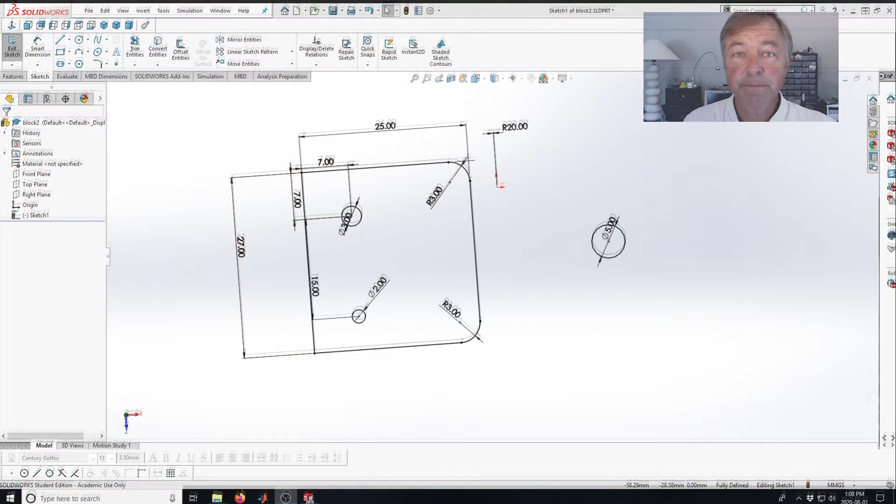Back to this sketch that I was working on in the last video, and I'm just going to carry on working on this sketch for now. So you can see I did the radii, I did these holes, but what I'm really thinking is this part that I'm making, I want it to be a plate that I can bolt to the ground or bolt to something. And I fixed this circle and this one, which will be holes when I do an extrusion. I fixed them relative to each other as I showed you in the previous video.

So I've made this. And you can grab any of the dimensions and move them around so that they're easier to read. I've made those dimensions relative to each other, so now I can't move the circles around. And you know, I could just keep doing these. I could draw some more circles, but that seems like that would be tedious.

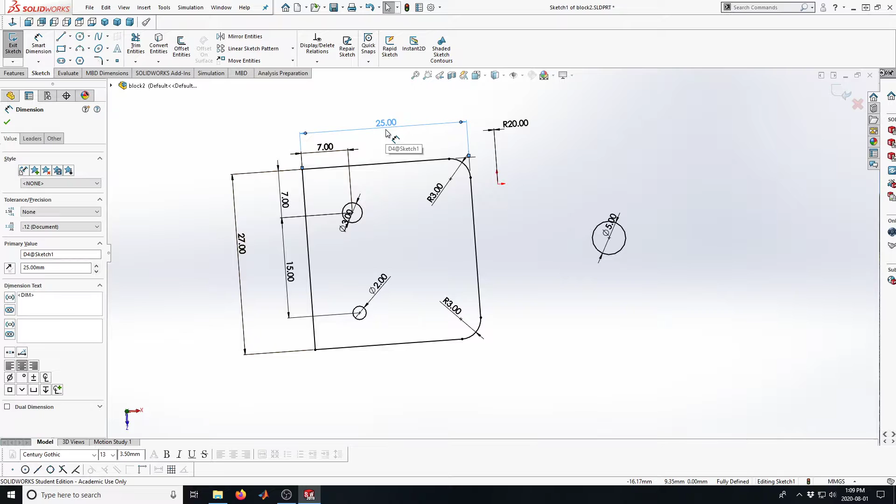For instance, what if I'm actually going to make this plate 250 millimeters. So it's going to be much bigger. And I actually want to have better, kind of a bolting array. Well, there's some things you can do in sketching that makes that much easier.

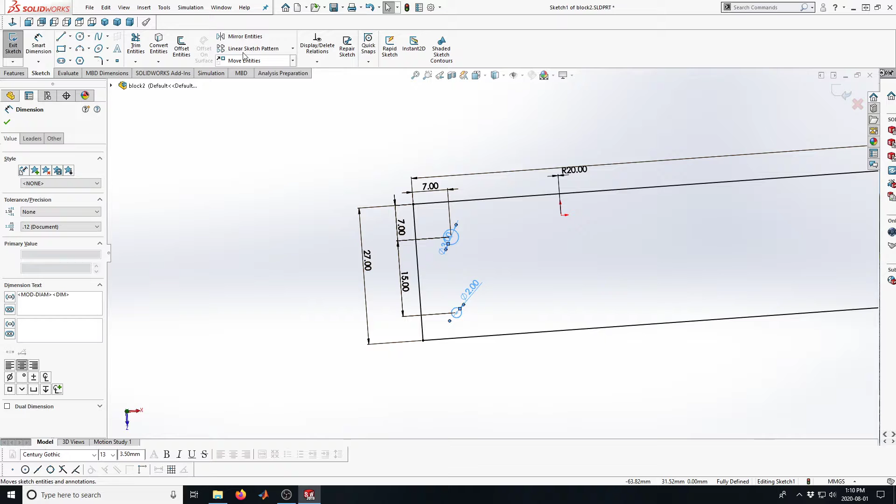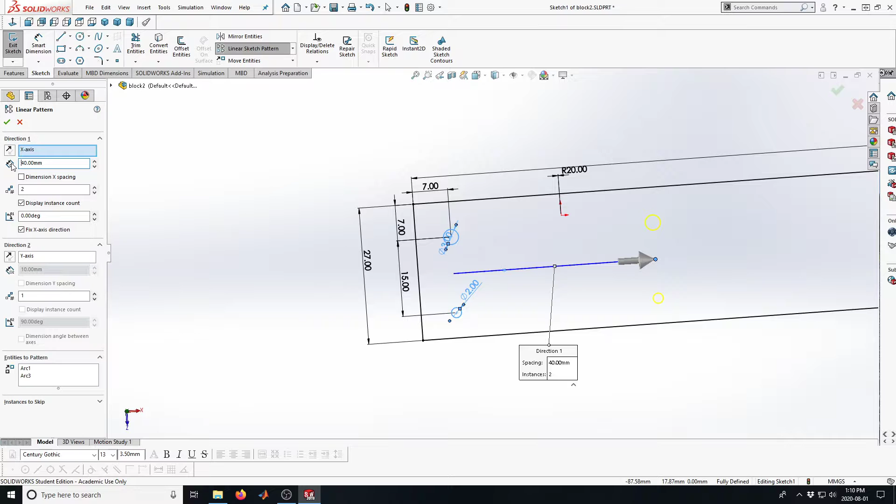So for instance, if I just take my mouse, hold it down, and you can see the drag box here, and showing in blue shows the things I've selected, I can do what's called a linear sketch pattern. So I select that. Now it's showing me by default those two things I selected, and it's going to make more of them. I can pick the distance I want between them. I think I want to make these 40 millimeters between them. And I don't just want two of them, I want a whole bunch of them.

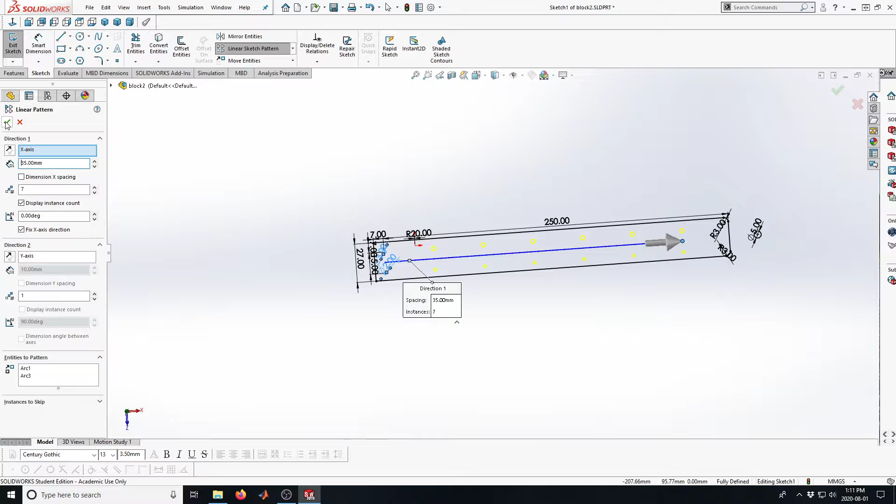Maybe I'll make them 35. Yeah. There's other ways I can specify how many of those to be, but that's a really simple way to make a pattern. Now the pattern itself is horizontal, and you can see, like I showed before, those things are in blue. If I click on them, basically they're in blue, meaning that they're not fully defined. If I click on one of them, you can see that shows up as a circle, and it's patterned and it's underdefined. So if I click that pattern, it shows me in blue everything that's there.

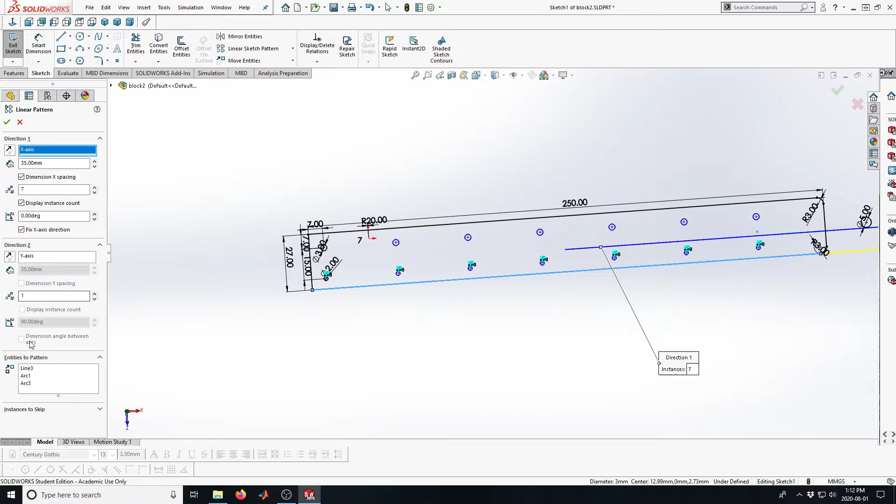I can then say, maybe that wasn't exactly what I wanted. I'm going to right click on that, and it shows as edit pattern. Now I'm back to the pattern editing thing that I was looking at before, and I'm wondering, why is that not fixed? I can look, it's on the x-axis. Maybe I want to make it relative to that axis. I'd kind of like to dimension that horizontal spacing, and I'd like to fix the x-axis direction. I don't have anything going on the y-axis, and let's see what that does.

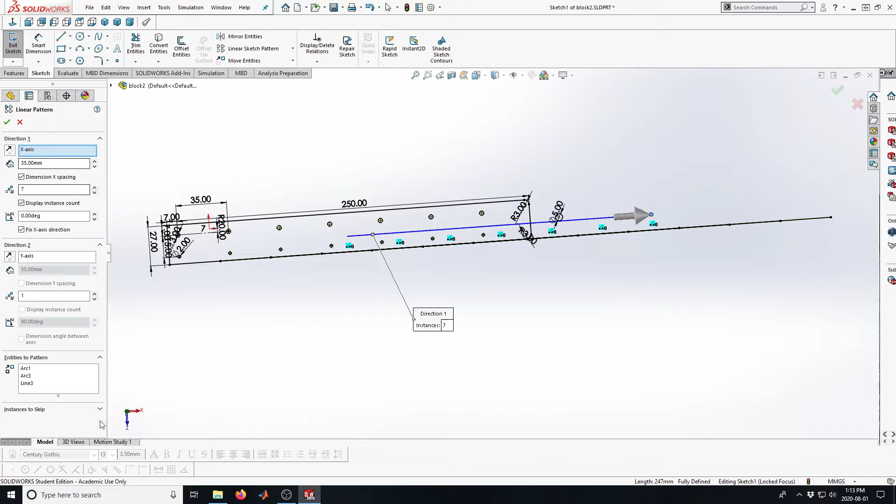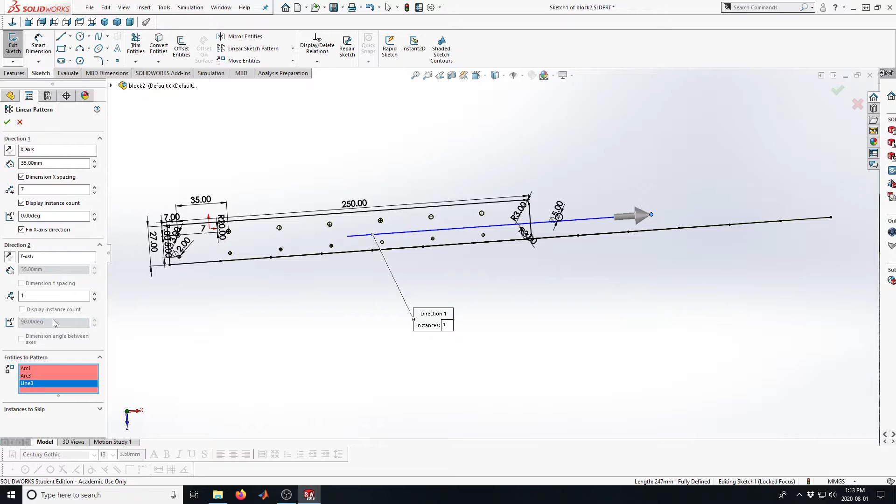And there, because when I made it before, I just ignored the fact that I was using something in the x-axis. Now it's showing me these dimensions because it decided it would copy that line. Maybe I want to edit that pattern again. You see, when I look down at the entities to pattern, I patterned the arc, I patterned the other arc, and I patterned that line. I don't really want to make a pattern of that line, so I'll get rid of that. There it did.

And so now my pattern looks more like I wanted. I don't have any of those crazy lines showing up that were in the pattern just now, and I don't have these in blue. Everything is locked in place, and I very easily made a replicated pattern thing. If I save the sketch, then it looks good. It's showing me that there's a dimension there.

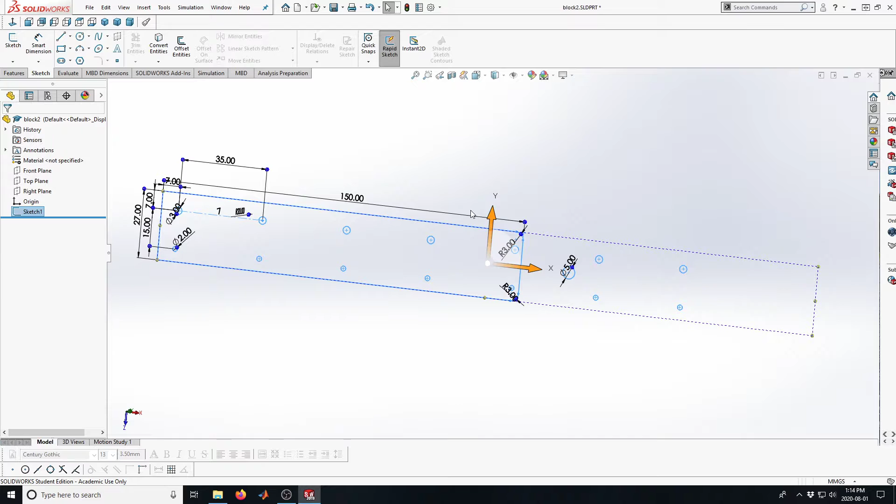Now you'll notice that when I highlight the sketch, all of the dimensions that I used in my sketch show up, and because I'm using Rapid Sketch enabled, allowing the 2D sketch plane to change dynamically, I can make changes to these things. Maybe I want to make that 250. If I do that now, it didn't change the pattern because I had those number of patterns.

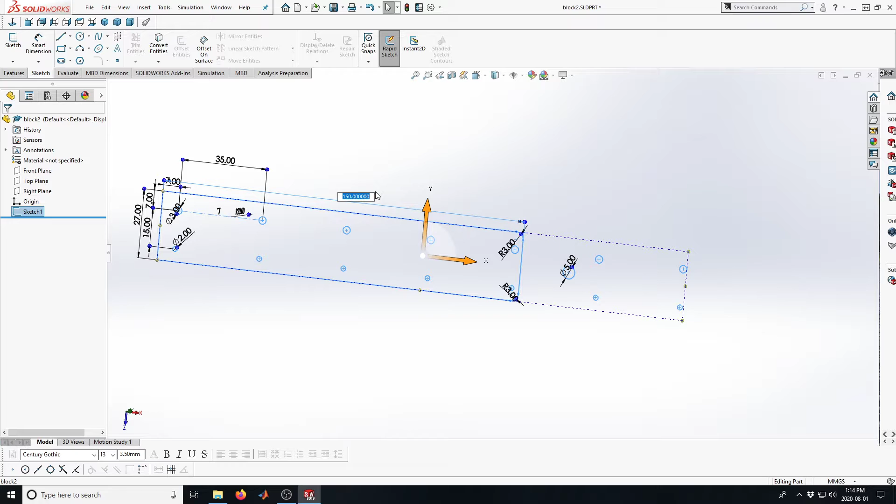And so I could potentially go and edit those parts. I have to open up the sketch to edit those. But some of these major dimensions you can edit from not even jumping into the sketch. So I've got this sketch now, and I've done some straightforward things with it. It's made a fairly complicated sketch, and I can go further than that.

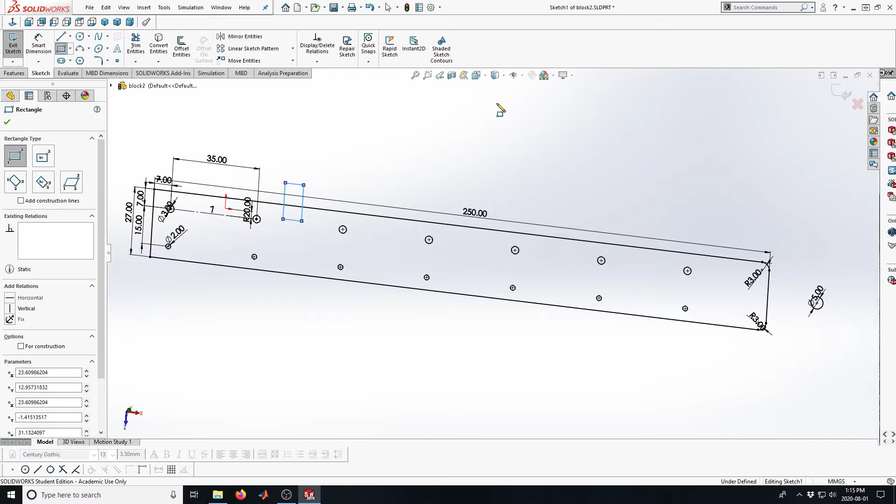I can go back and edit the sketch and say, well, you know, I actually wanted a couple of cutouts like that. You can see that I'm in the sketch editing view, and I've drawn this rectangle, but what I really wanted was a cutout. Well, there's these trim tools here. These are really essential, and you'll use them all the time. If I select this trim entity, it gives me a bunch of ways to trim things. Power trim is a good place to start.

And if what I do is move my mouse somewhere close to the things that I want to trim or get rid of or cut, and I hold my index finger, my left button down on my mouse, and I drag it across the things that I want to trim, they cut away. Now if I drag them back across, they're still fine. And if I go like there. So now I've made this cutout by drawing a rectangle and then getting rid of the parts that I didn't want.

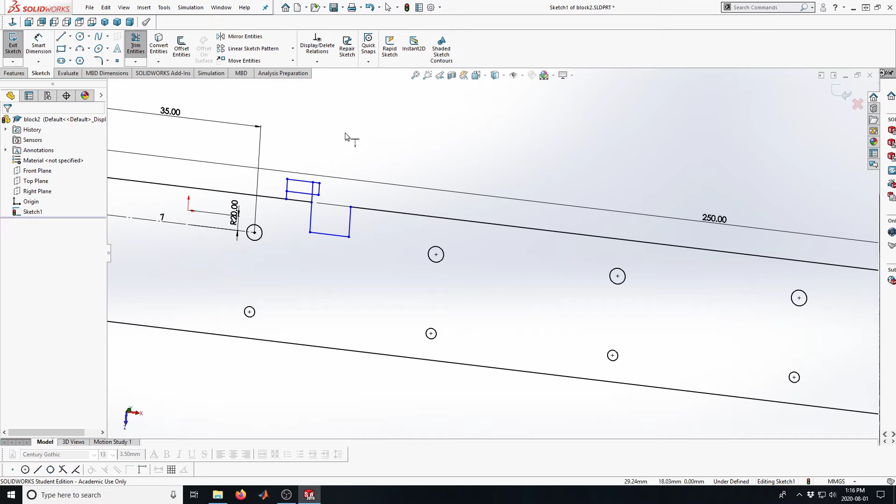What if I want to have a tab like so? But wait a minute, that tab isn't connected to anything. Well, just like trim, there's also extend. And I can click anything here and I can extend it. So all I did was I pressed the extend button and it extends to the next nearest feature, the next nearest sketch feature. And that isn't exactly what I wanted. I want to trim that, and now I have this funky looking tab. I could then, if I like the look of that, I could dimension it.

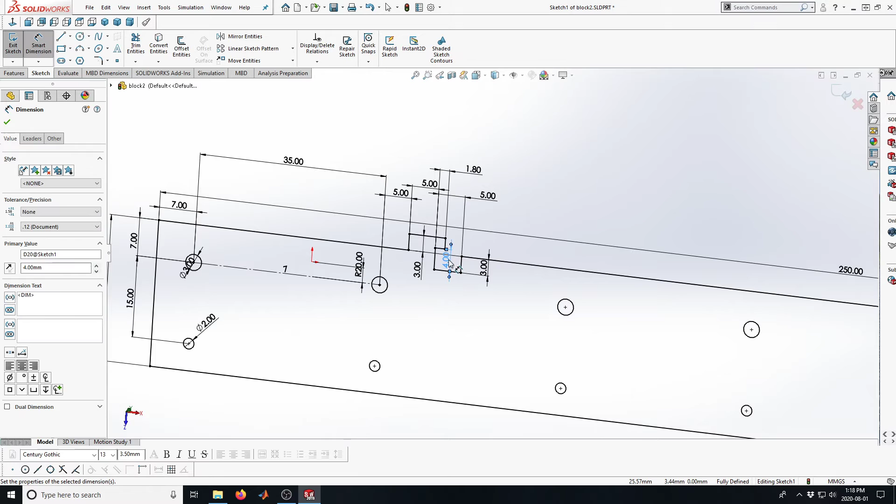So as long as the topology is what I had in mind, the details of the dimensions and how big things are, you can sort out later on. There we go. And so now I have that new little funky clip there.

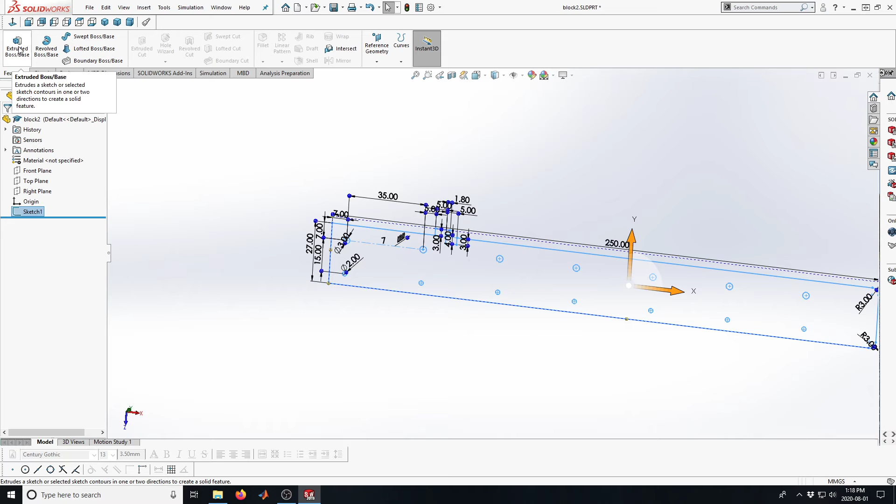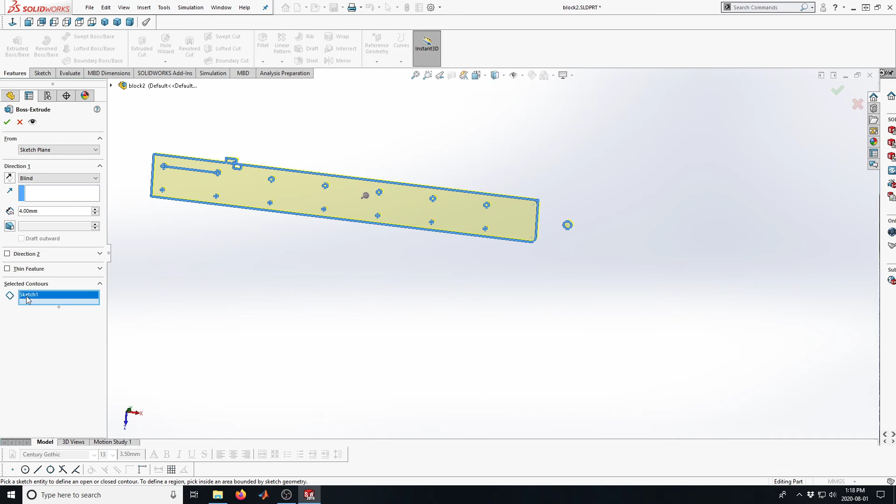Now that it's a sketch, the last thing I'm going to do before we're done this little video is extrude it into an actual plate. And it knows that if my sketch was like so, it's going to extrude everything. I really only want this to be 4 millimeters thick. And as you saw in a previous video, I don't want all of those things. I want that contour and only that.

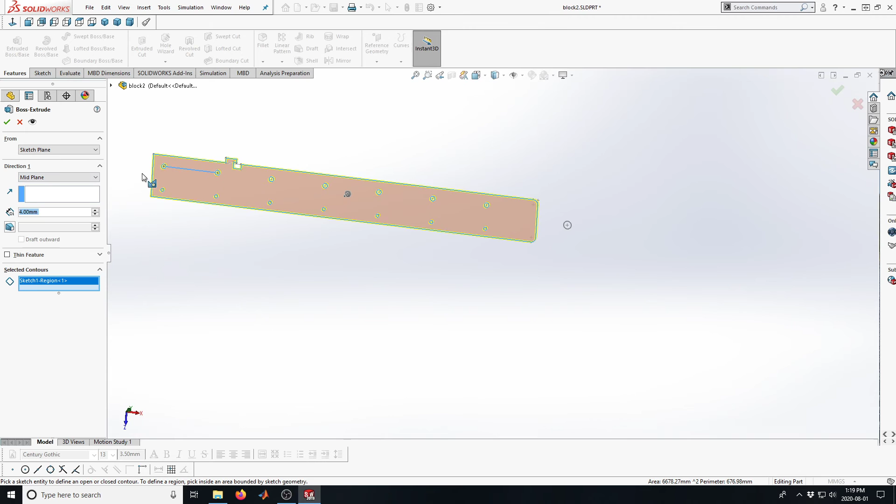And you can see when I selected that contour, just because I'd made this sketch more complicated, I don't want to pick that circle. Also, what you saw from one of the previous videos is I made it mid-plane, so now the sketch is the middle of the part just because of the last thing I'm going to do. So I've got this rather complicated looking thing.

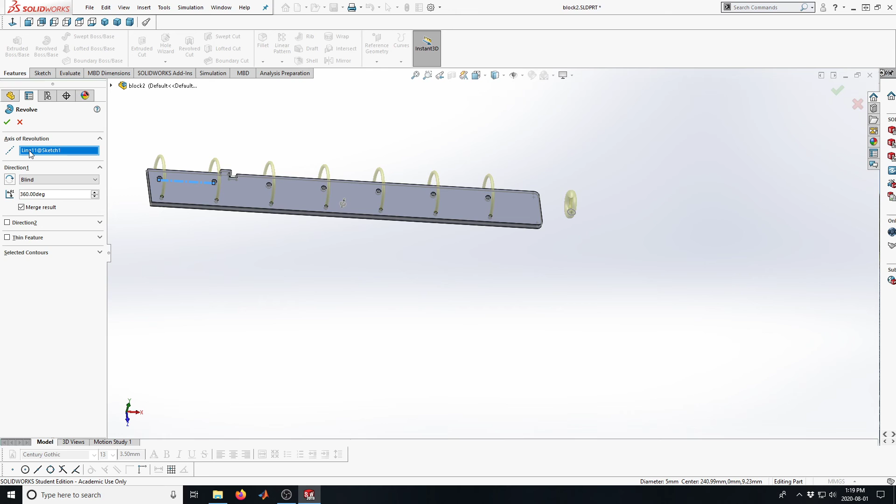Now, just like we did before, I want to use that circle, but I don't want it to go around like happened with this. I want to rotate it around that. Now it's picked a whole bunch of weirdo things. The only thing I want to select is that. So it was trying to guess my intent, but it didn't guess very well.

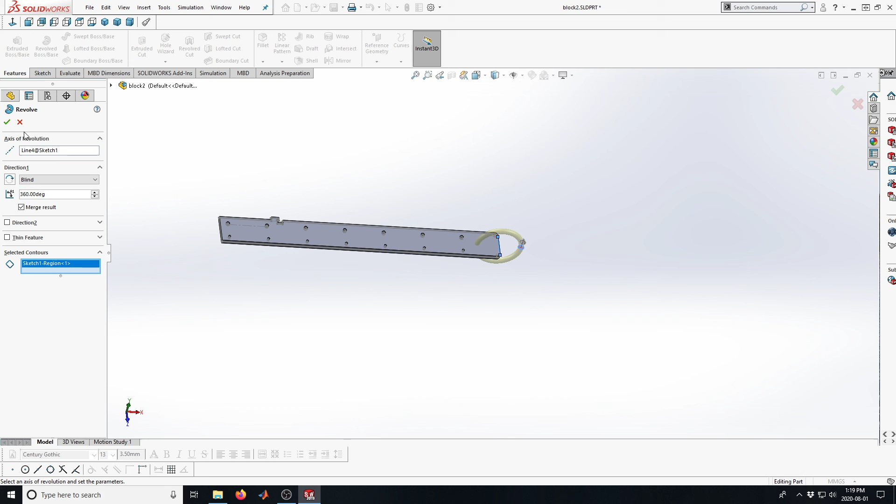There. So now we have this plate with a welded ring on the end of it. It looks a little different than we started with because it was kind of a wonky thing. Now this is getting to be something that looks like maybe there's a purpose for it. Maybe this is a serious part.